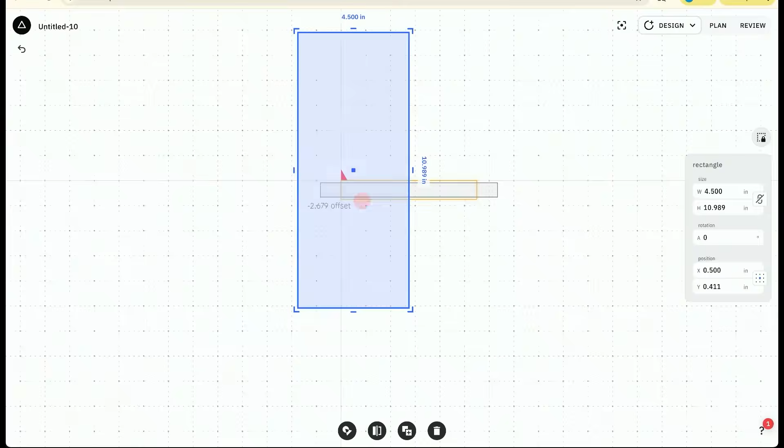Everybody, we're back from a live show where we're going over sliding dovetails. We build them on Origin, bring them in the studio, design some cool things, show you how to do tapered sliding dovetails as well, and then Jake cut them out by hand. They turn out perfect.

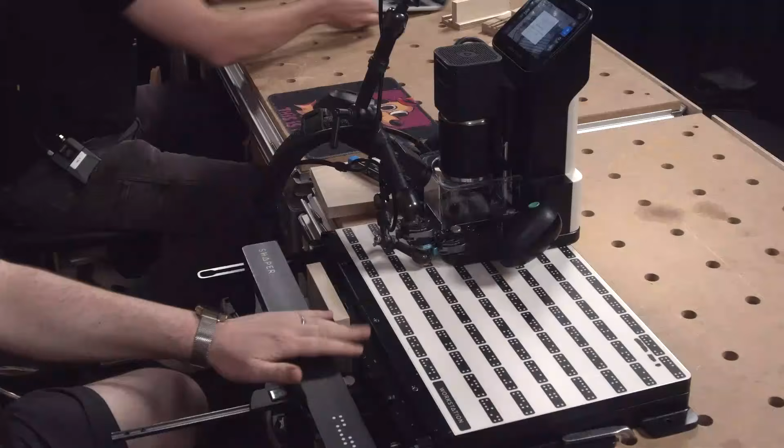All right. I'm going to start off by just getting our workspace going. We have some poplar set up, some 3/4 thick poplar. We are using our 15-degree dovetail bit.

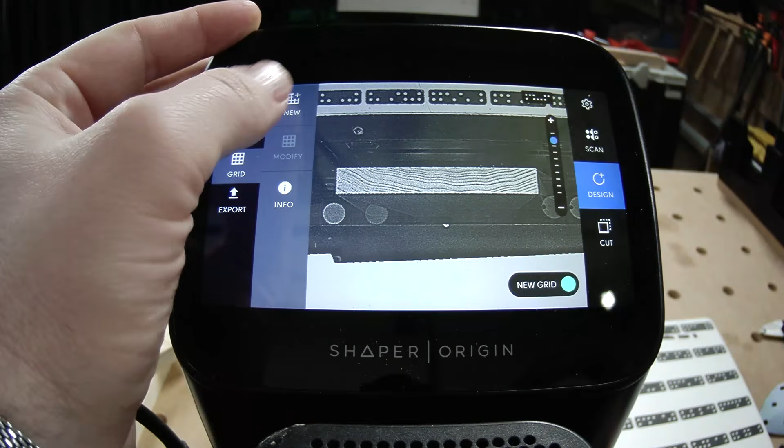I'm going to go ahead and create a backside grid. For this, we could either do a rectangular probe to find the center, or we can do a backside grid.

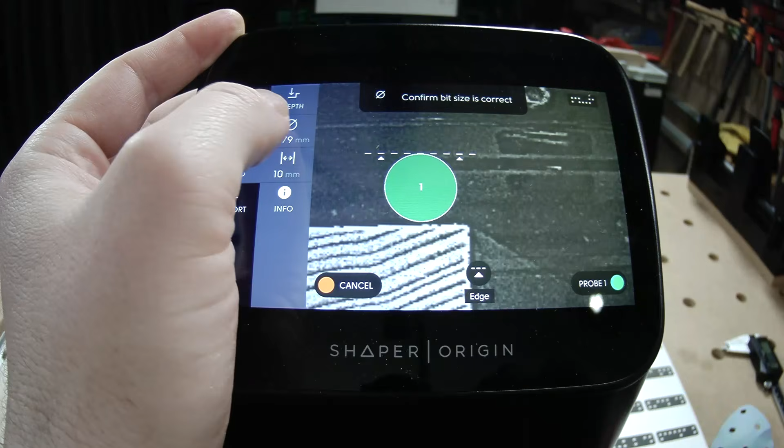Yeah, and maybe while Jake's setting that up, we could come over to this front cam for a second. When we're cutting dovetails, we want to be very careful about which way they are going with the grain. So we have the grain running this way. We're going to want to cut this way for these dovetails, because if we were to cut this way and have it on the top here, this part would want to break off quite easily. If we come here and we cut, we have a pretty strong grain direction that's going to keep it going.

So make sure you're paying attention to the grain of your wood when you put it in there, because I may or may not have accidentally cut one the wrong direction. All right, my material, so that you can get it set up in Studio, is 0.75 on the money.

We're going to pop over to here, and I'm going to make a new design. And I'm going to first enter this stock that Jake has. So how big is it? 0.75 high. Okay, so 0.75 high. And how wide? 5.5. Okay. I'm going to click this button up here to zoom to my selection. And that's going to just recenter the camera for us.

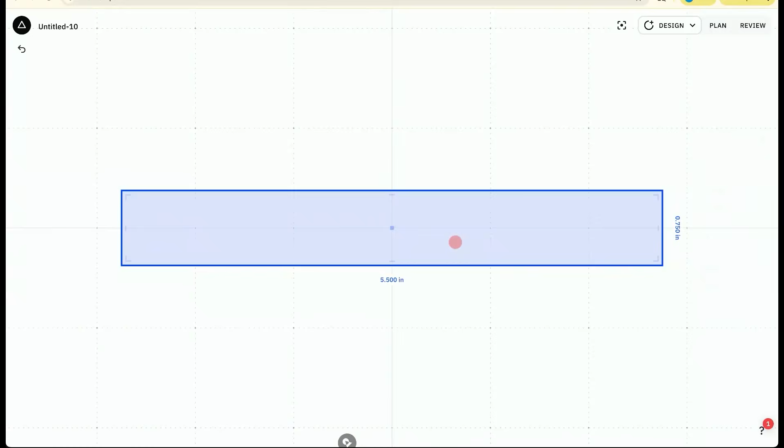Now, this is essentially our stock. So I can do a couple things. I can turn it into a reference path and use that to snap and create shapes around it, or I can leave it as is and turn it into a guide later so that we don't cut this. We just want to be able to use this shape to build our joint on top of.

Now, for the sliding dovetail, we're gonna come over to this front cam. There's a couple key parts to think about. Where did I put that bit? The dovetail bit. Okay, so the number one thing to think about when you're building this is that the dovetail bit that you're using has a certain width at the top. And that's going to eventually need to run through your material to allow this part to slide into it.

So the piece that we're going to design has to at least fit the max diameter of the bit. Okay, and in this case, this bit is 13.8 millimeters, the Shaper bit. So I'm going to come into Studio, and I'm just going to create another rectangle.

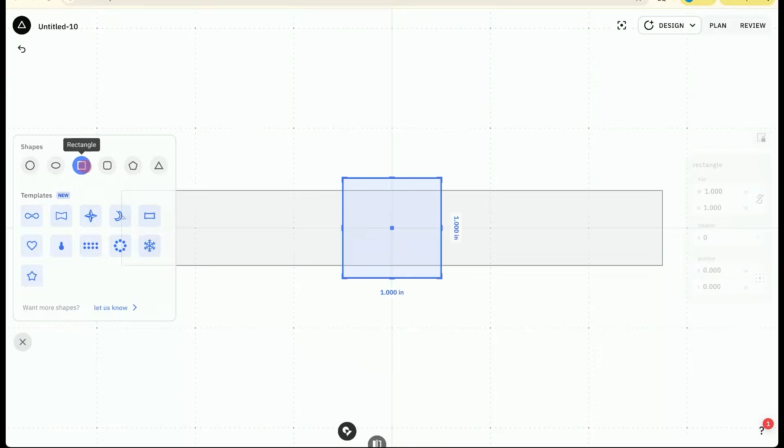And we'll start by, okay, this is one of the great things about Studio. We can go into our height, and I like to go a little bit over the 13.8, just so we get a little bit of room if we want to do some offsets on that final pass. If we get it a little bigger, we can actually, in Origin, make our cut offset and kind of clear that waste out and then come back with a nice finish pass.

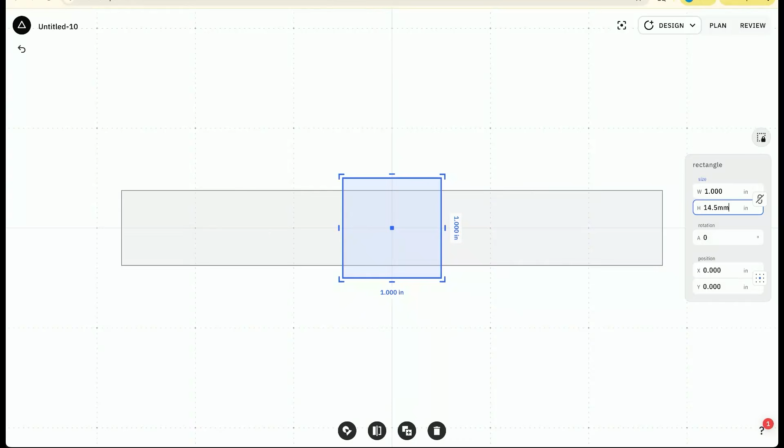So if our bit's 13.8, I'm going to do 14.5 millimeters. And even though I'm in inches right now, if I just type in millimeters here, it's going to automatically convert that. And that is great because now we have a piece that is almost as thick as our material, but not quite. We probably want to make it so that this piece here is always a little bit smaller than our stock material. Otherwise, we're going to have trouble.

This is one of the things. Basically, the diameter of your bit can't be as big as the width of your material in general. Okay, so if you have a big dovetail bit and a small piece of stock, it's not going to actually work out very well for you. You're going to find out problems later. So just make sure, rule of thumb, your stock material is bigger diameter than the width of your bit.

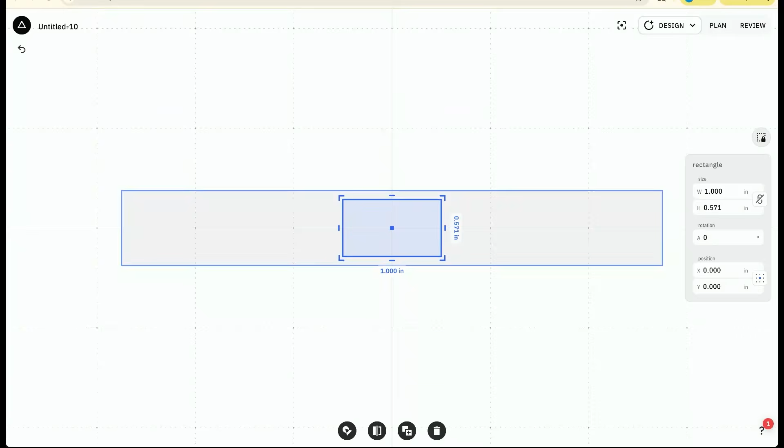And now I'm just going to take this shape. This is the shape we're actually going to cut, and I'm going to stretch it out and make it a little bit over the edges here. Now, one thing when we're using dovetail bits, when we go to cut this, we're going to plunge once and cut all the way through the material, come back around the other end, all the way back, and retract. We want to make sure that while we're cutting, we don't retract the bit, because if we do, we're going to come up through the top and we're going to have a little hole in the top where the bit is undercutting the entire time.

So when we're making this file, I'm making sure that I can plunge off the edge, get down to my depth, come through it all around it, and then I'm going to come back off the material and then retract. And that's going to make sure that I don't have any problems. And this is just something you're going to have to think about anytime you're using dovetail bits, because you can't retract in your material or you'll mess it up.

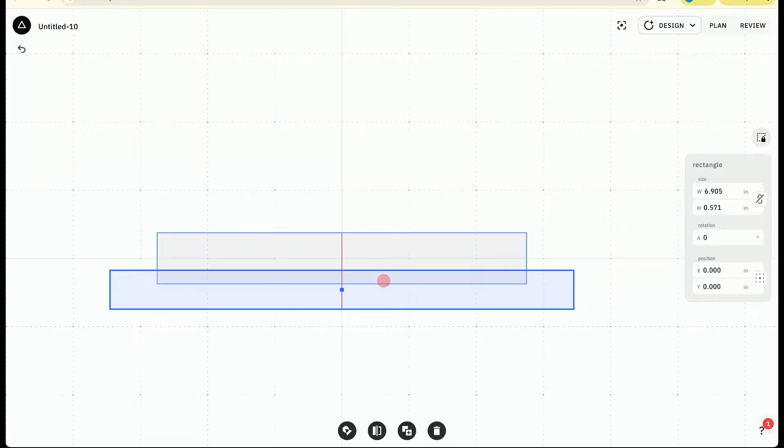Okay? So real quick, before you get too much further, a custom anchor point. Yes, let's go ahead and do that. So Jake set up for a back left grid. So I'm gonna go ahead up to the design menu here, make sure my position is on, and click this add origin anchor button. And you're gonna see a little red triangle show up. And that's gonna be the stock where that point we made the grid on shows up.

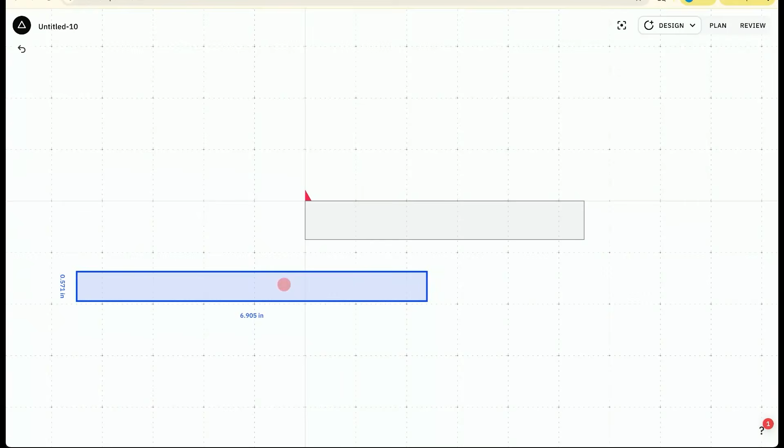So all we need to do is take this main shape, and I'm just gonna drag it and snap it right there. And boom, now we have the back corner of our stock at the same point as where Jake made the grid. So now when we import that shape, it'll go in the right spot. So I'm just gonna take this shape that we're actually gonna cut and move it back, and you'll notice these little red lines show up when I'm dragging it around, and those lines basically auto snap to other objects in the world. So as long as I see this little triangle or crosshair, it's actually gonna snap perfectly, and now I know that this is centered on that, which is great.

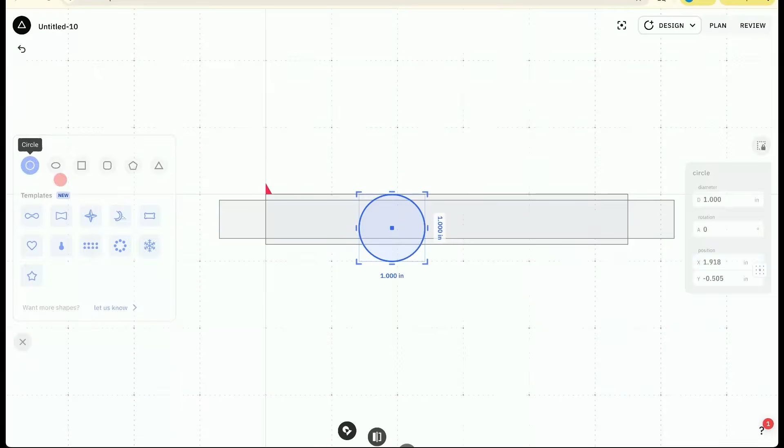Okay, now it's good that I'm coming off the edges here, because we want to come around the edge on both sides. If we want it to be a through dovetail, we need to cut dovetail all the way through the material. And then the only thing I need to make sure is that I can plunge outside of the material. Now, we know this bit is 13.8 millimeters, so I'm just going to make a quick circle to check. And I'll just change this to 13.8 millimeters. And now I can get an idea of if I were to plunge on this line over here, I'm not going to hit that material.

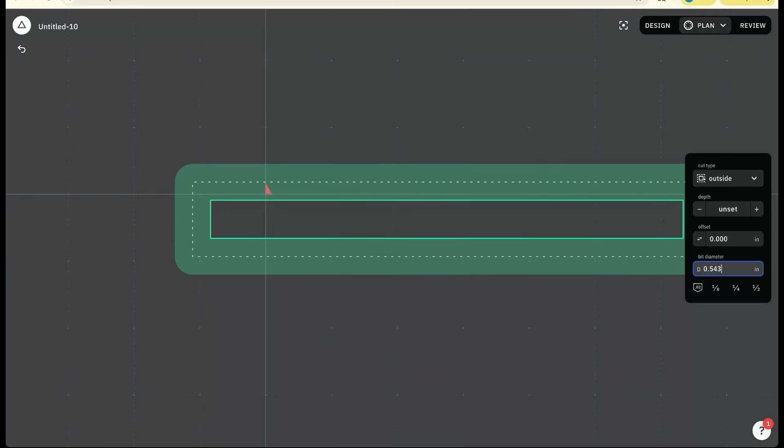I'll turn that into a reference path just so you can easily see the stock versus the shape. And that looks good. We can plunge in there, but maybe I'll make it a little bigger. It's always nice to have a little extra room so that you don't have any issues. Okay, I'll delete that circle since we were just using that for reference. And then I'm going to go to plan mode. And I'm going to make sure my bit diameter is the same, 13.8 millimeters. And now here's where the tricky part comes in, okay?

And now we're going to jump over to the community, because a friend of the community, Bo, made a little calculator that helps us determine the offsets and the depth we need to cut. So we kind of have to figure all this stuff out up front. If you just click into that link here, it'll take you to this page here that basically gives you all the settings. So step one, fill out the degree.

The Shaper dovetail bit is a 15-degree bit, so that's entered there. And I know I want to cut this to a 10 millimeter depth dovetail. And what it's going to give us is settings that say, hey, for the pins, you need to basically have a negative offset of -2.679 millimeters. And for the slot on the inside, afterwards, we're just going to cut that to 0. And so that's going to make it really easy for us.

And what I like to do in the Studio file, just to make it easy for me, and especially when me and Jake are tag teaming this back and forth, I'll come in here and add some text, and I'm just going to copy that number. And I'm just going to put a little guideline in here that says, make sure, Jake, you cut this at this offset. Okay, we'll place the text. I'm going to scale it down and just move it right where I'm going to plunge. That way we can see it and we don't forget.

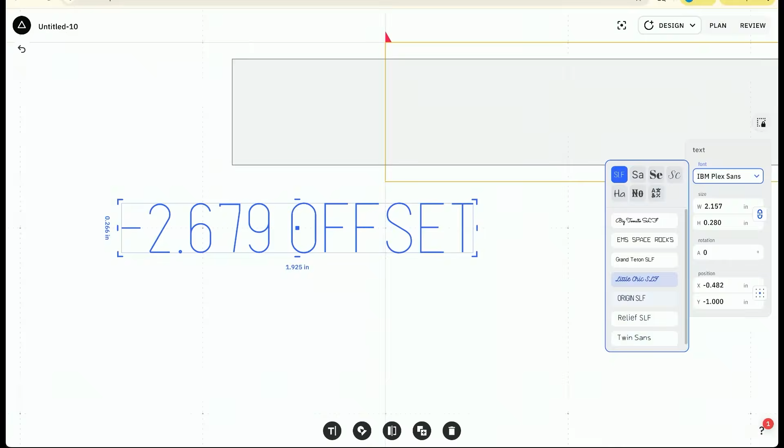And you know what, Jake? I really love single line fonts, and Studio has a great selection. So I'm going to go over there and click single line font. And which one you like? This one? Let's do Relief. It's a little easy to read, okay? There you go. Cool. So now when we go to Origin, that's going to be in there.

Now, last step before we forget, I'm going to select the shape, go to Plan Mode, and I'm going to turn this into a guide so that Jake doesn't accidentally cut these letters. But I can still see them in the file. Correct. Difference between a guide and a reference path? Yes. Guides come over to the tool. Yep. Reference paths do not. Yeah, so this stock shape is not going to come over when we import it, but the guides will. And so sometimes you need both or one or the other.

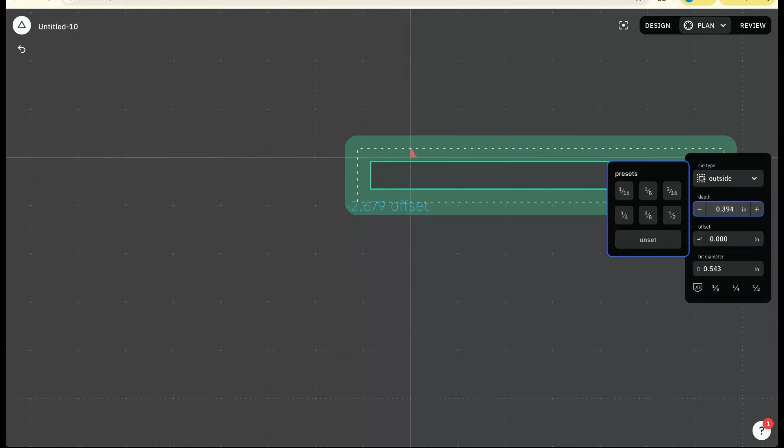Okay, so this is our basic setup, and then the last thing I was going to do is, just so we don't forget, Jake, I'm just gonna set this to a 10 millimeter depth. Beautiful. So that way, that's also pre-programmed in. Okay, so this is the most basic file I could build to do a through sliding dovetail. And there's a lot of complexity that you could add to this, but even with a couple simple rectangles and using the calculator from that website, we basically have everything we need now.

So maybe, Jake. It's on there. Yeah, should be on there. Should be ready to roll. I was gonna say, so far we could make that design directly on tool. Yeah, we could have totally made it on tool. But something tells me when we get to tapered land, yeah, and Studio, after the break, we'll need a little extra.

All right, I went ahead and made a back left grid. Let's bring in my top line file. And using the custom anchor point, drop it at 0, 0. I went ahead and just did a manual Z-touch. Yep. Right on the edge of my material. Yeah, and when you're working with dovetails, I would suggest manual Z-touch is probably the way to go, just because there's so many little details along this step. So I've been doing manual Z-touches for it and had pretty good results.

It depends, too, if your dovetail bit is center cutting. Yes. Which often they are not. Yeah, if we were to look here, the only cutting parts of the dovetail bit are on the top corners, and the inside slants down. So when you Z-touch, you're only touching off those two tiny little points, and sometimes they will dig into your material. Yeah. So anytime you have pointy bits, just use manual Z-touch, and then you'll keep going.

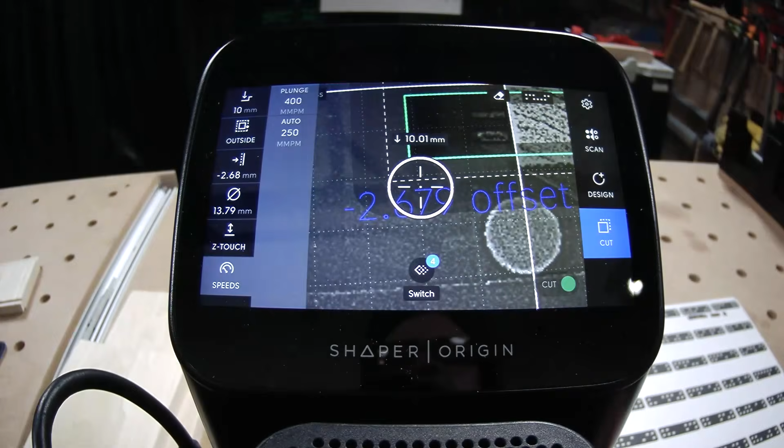Yep. Okay, Jake, I think we're ready to cut. Let's go over some details, though, before we do this. One detail: do not click the red button when you are under the material. If you find your depth's wrong or anything, you need to get out of that material before you retract. Otherwise, you're going to come out. So that's the one. And then 2, make sure you plunge off of the shape when you start, because you don't want to start on your material because you'll do the exact same thing.

And 3, slow yourself down on the exit. So I'm going to slow down considerably when I finish the cut. Yep. To try to avoid any blowout at the back end. Correct. All right, here we go. What spindle speed are you at? 5. Okay. Yeah, feels right. Yeah, 4 to 5 feels good. Don't get too fast, because if you're undercutting, you start burning up a little bit. You really can't retract and get out. So I'd say 4 to 5 is a good starting point. 4.5. All right, let it rip.

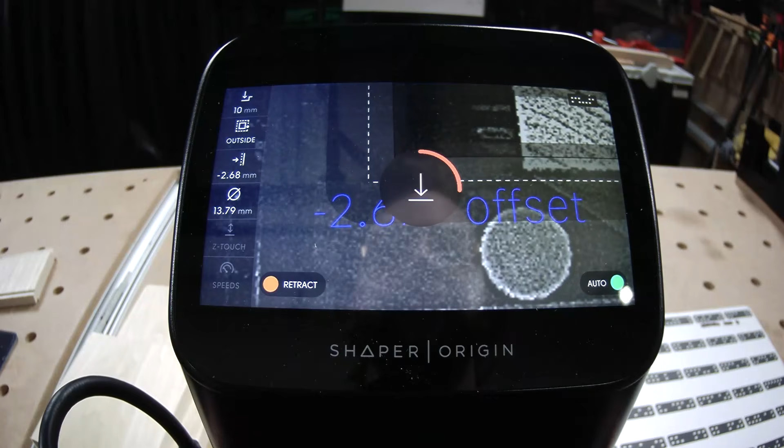So, you also have to do this in one pass. You can't do multiple passes here. So how deep your dovetail is determines how hard the cut's going to be. You can see here Jake's slowing down now as he goes around that corner. Anytime you come in or out, you want to just go slow, because you will see tear out. Now we're going to talk a little bit about what to do in that case and why this kind of through sliding dovetail is pretty cool, because we can eliminate that tear out later by trimming the pieces. But you can see it came all the way across the edge and then retracted when he's off the shape.

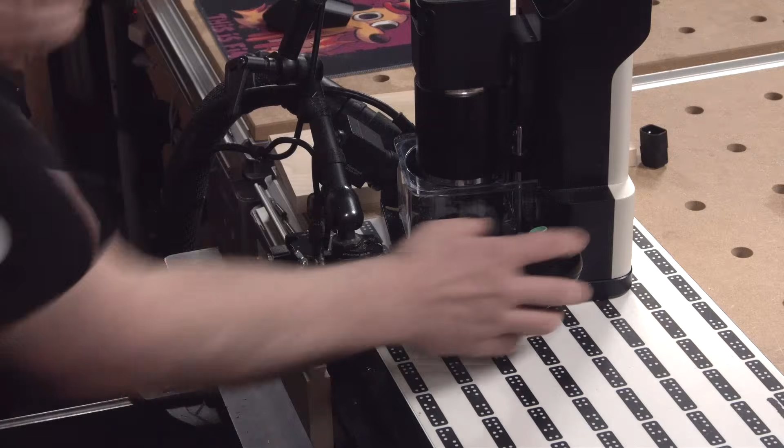All right, so let's take a look and see what we got. How's tear out look? Perfect. Nice. Yeah, if you move into that cut a little slower, it will do a better job. And then especially when you get on the outside and you're going into air again, definitely want to slow down a bit. Okay, so one cut. If you wanted to, we could have done 2 offsets, but in most cases I've been feeling pretty good with a single pass, going slow, getting good control of the machine. Yeah. You don't need to do an offset and then a second pass, but we're going to do that when we get to the other side. Okay, nice. So that's pretty much it for this. Set up for the next spot.

Okay, now there's a couple things. We may have to change one little thing in Studio because I forgot. What'd you forget? Well, maybe while Jake's setting this up, I'll explain and fix it. So when I made this file, we know that we're using this back grid. Now we're going to rotate our stock 90 degrees from that, and we're going to cut it back and forth on the workstation. Now, the workstation has some space behind it, and you can see here, this is a key part. We've lowered this down to the first row, so that way we can cut beyond it and come back. Now, this dimension, do you know off the top of your head? 25 millimeters. 25 millimeters of depth. Oh, yeah, this way is what I'm looking for.

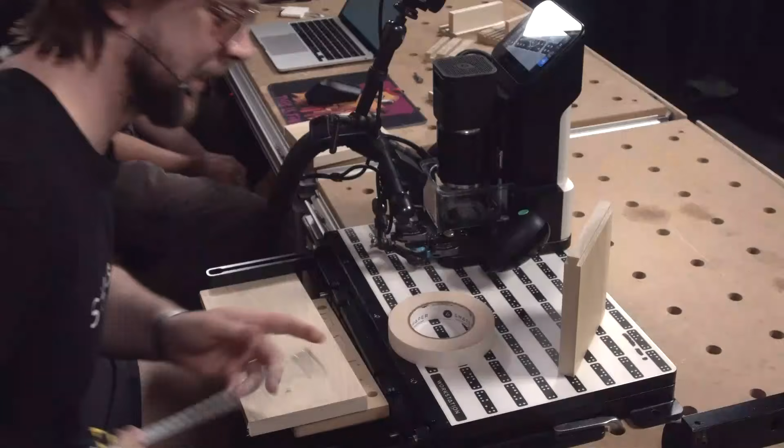I don't know, but I have tape right here. 50 millimeters. No, it's 21. 21 millimeters. Okay, so let's come here, and I'm just gonna kind of give you a quick understanding of what's gonna happen.

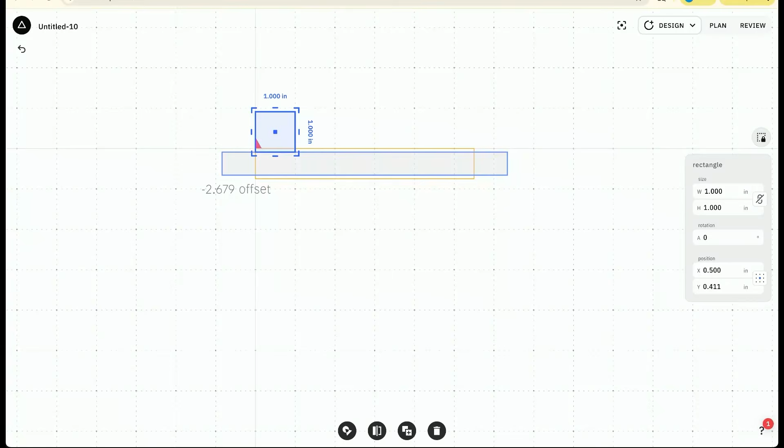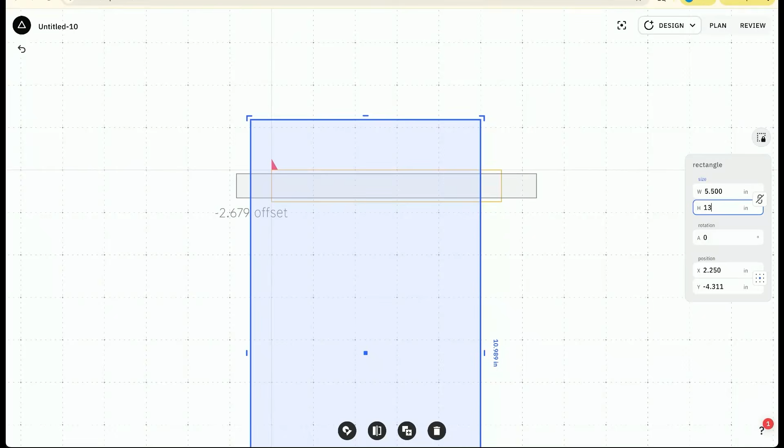So I'll draw quickly a rectangle, just to represent our material, like our stock would be, and make it a little bigger. It doesn't have to be perfect, but just to give you an idea. This is essentially the stock we have, and our sliding dovetails are going to cut through the stock. Now, what size is this? And then I'll just type it in, and then we won't have to guess. This is 5.5. Okay. By 13 and 15/16. 13 plus 15 divided by 16.

Don't you love Imperial?

Okay, so now we have essentially the exact piece of material that's going to sit on the workstation. And so we can kind of put it wherever we want. Now, one of the things you're going to notice with sliding dovetails, and I made my mistake already, so you can learn from me. When you make one, let's come over here, and I'll just explain this real quick. So let's say this was our material here, this right here, and it comes all the way across, we're going to cut that sliding dovetail through right near the end because we're making a cabinet.

You need to make sure that you're not too far to the edge, or else you're going to have no strength on this little piece, and it's just going to break off. So you kind of need to step it in enough that it doesn't break off. And this is going to be a key thing where, if you were doing a mortise and tenon or something, you could put it right on the edge. But when you're doing these sliding dovetails and you're using them as support, you need to make sure you're worked in at least a little bit, because you're even going to cut in a little of where the material is. So just a thing to think about.

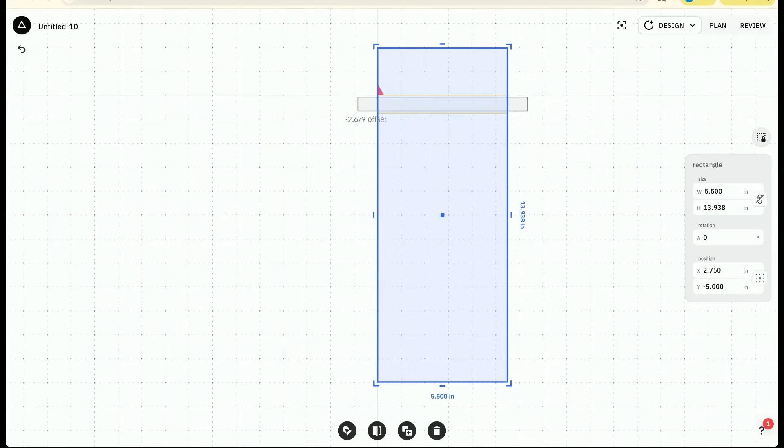Now when we come back over to Studio, that should make a little more sense. I'm just going to make sure this material has got some space between the corner. Obviously, if you were designing something, you would dial it in a bit more. Okay, so now we have our stock. I'm going to go ahead and make that one a reference path too, just so we can keep an eye on it. And I'm going to come over here and make one more rectangle, just so we can make sure we're not going to cut into the workstation.

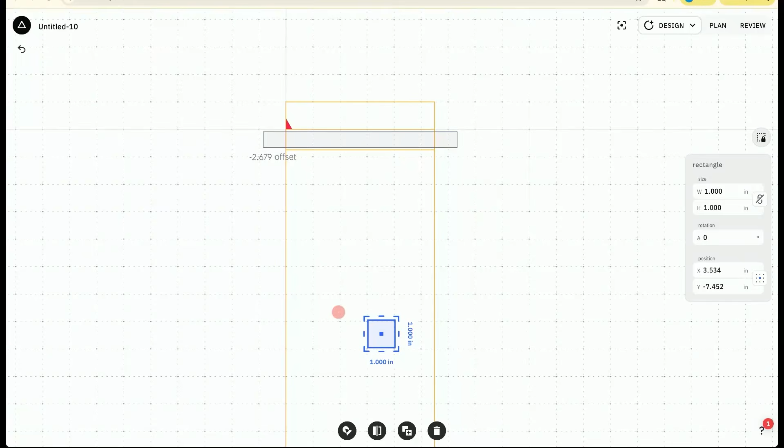So I'm going to take that little rectangle, and we said, what, 21 millimeters? 20. 20 millimeters. So we'll just make a little square to represent. So this would be right on the edge of that material. And you would see, if we were to cut this right now, when we're going to cut an inside pass on this, we would kind of run into the workstation a bit. Okay? So in order to fix that, we're going to want this lead in, so we're off the material here when

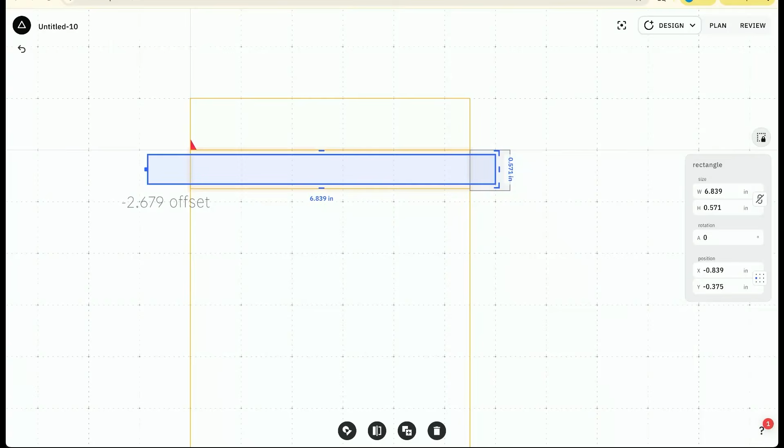we come in. But this, I'm just going to reduce by changing the anchor point to the front here. And then I'm going to grab this slider and drag it down so that it comes out the back enough that the bit will clear it all, but not run into the workstation. Nice. Okay. And I'll turn that into a reference path too, so it doesn't show up. Okay, the only other detail here is now, instead of cutting an outside cut, we're going to cut an inside cut. So I'm just going to change that from an outside to an inside.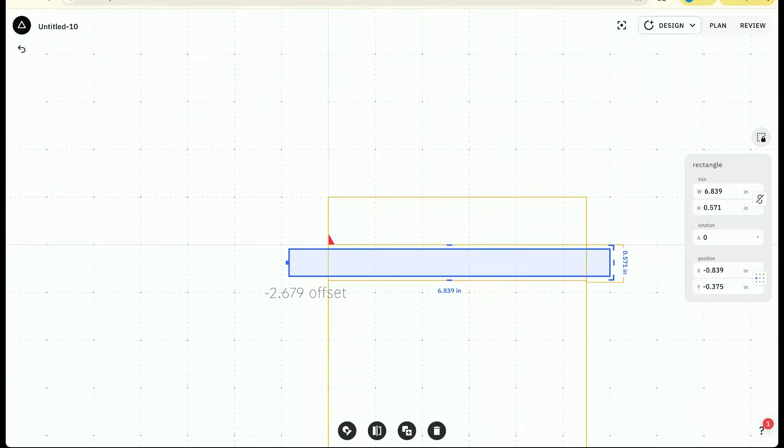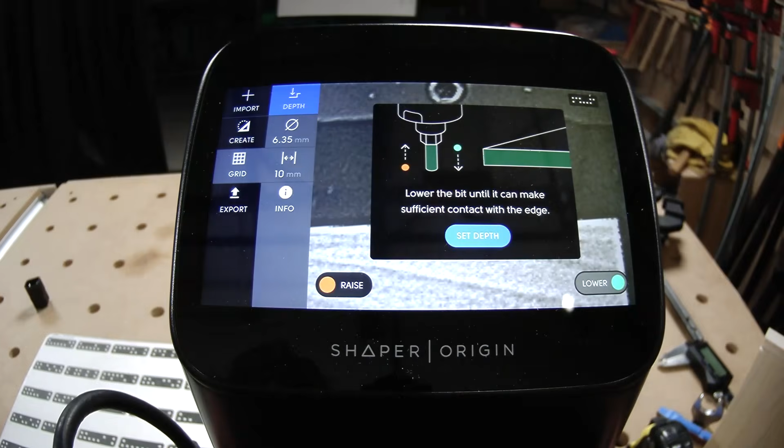And this is great because you can see here with the bit diameter that we're using, I have just enough room to do a little inside pass with a small offset, and then we'll come back and do a final pass with a final offset. Perfect. So my roughing offset should be, what, 0.5 millimeter? I don't work in millimeters, but I would use 200ths. 200ths. You got it. And I'm not going to make a backside grid again. I think in this one I'll do a front side. Yeah. Just so we can reference that front face. 1, 2, 3.

Mm-hmm. Yeah, it's pretty fun.

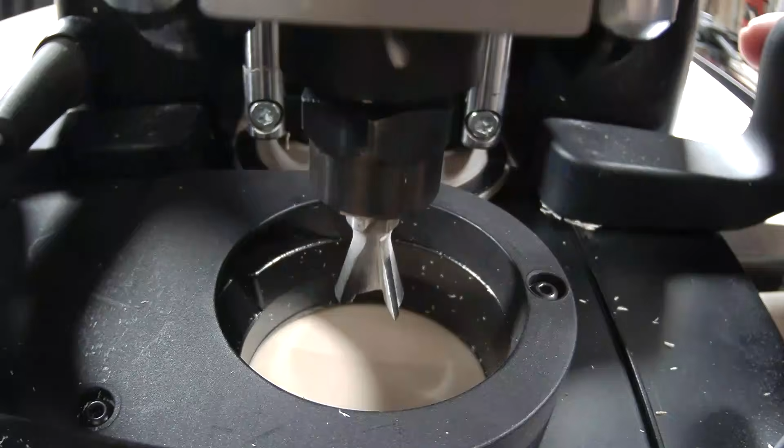When we go to the second part of the show, I'll show you a little cabinet I was working on, and you can see how some of these things will just add up to a pretty sweet little thing. I would say cutting sliding dovetails is more complicated than a lot of the types of things you'll do on Origin, but with a little bit of practice, you'll start feeling really comfortable, and it kind of adds a whole other dimension to interlocking joinery.

You know what's nice about this one too? As I'm just tapping that green button to lower down for the manual Z-touch, I'm tapping really fast, moving Origin to see as soon as the blades catch and twist slightly. That's my 0. Yeah, ideally you want to lower it with just slight taps, the lightest little tap you can do, and then drag it forward and backwards or twist the Origin a little bit, and you'll see it just take a tiny little hair off.

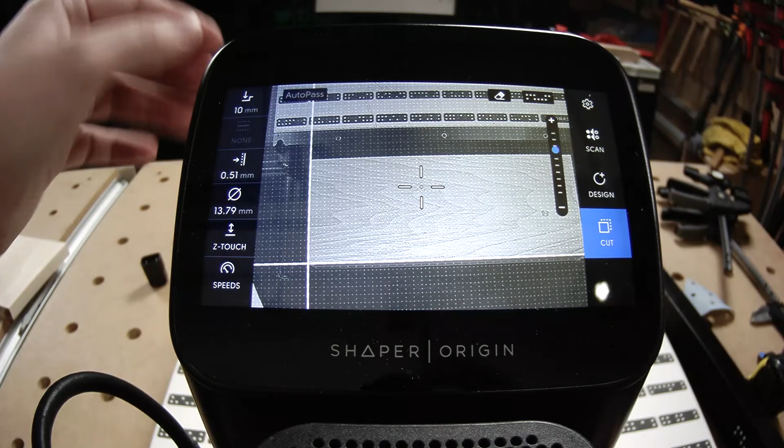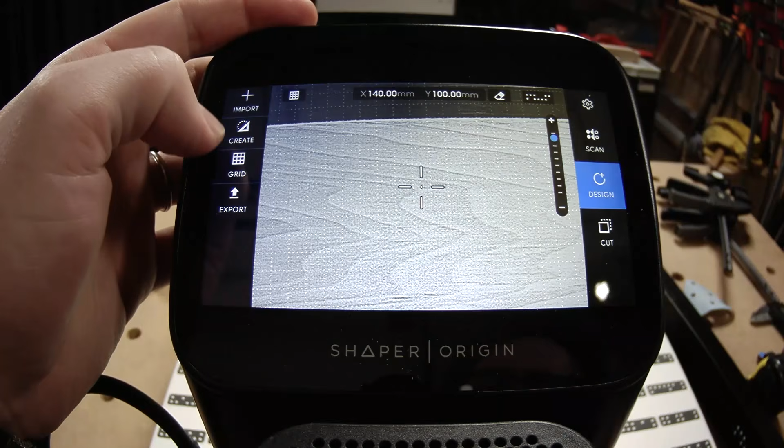Okay, here we go. So we'll import this file. Now this is the straight sliding dovetail. So this means the file that we cut already and this file are line to line, perfect all the way down. Oh, that is it. You're gonna have to rotate it. So we'll bring this in. It's gonna come in with that anchor point. Just rotate it 90 degrees negative, and then we should be good to go.

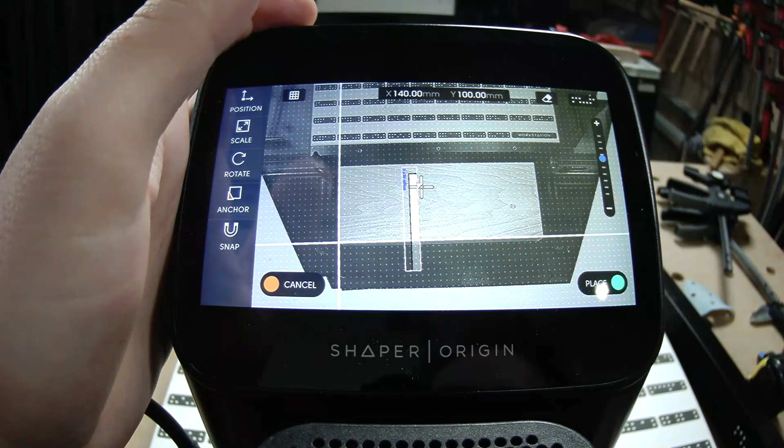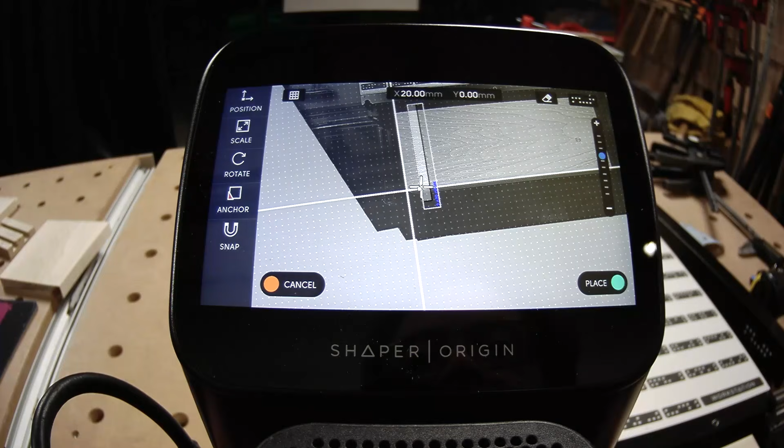There we go. Okay, and then you can pick wherever you want it to go for this one, but don't get too close to the edge. Our Y is set to 0, and we're stepped in. Let's do something like 20 millimeters. Okay. All right, so now we've Z-touched. We have our bits selected at the same diameter. We're going to change that offset to 200ths maybe, and that'll be our first pass.

When you're cutting in grain with a dovetail bit, it feels pretty easy. When you change to this mode, things feel a little different. Right. And so I would suggest that first pass, try to offset it just a little bit so if you do have any wiggles, when you come back around with that final cut, you'll get a nice clean finish. Okay, our slot is just barely bigger than my dovetail bit. So we should have made it a little bigger. I can only do 0.3 millimeters offset. All right, let's do it.

Okay, so we're going to do 2 cuts, plunge off the material, go all the way back and forward, and then retract when we get back to the end. And look at that, plenty of space. I can see my workstation. We're good to go. All right, let's do it.

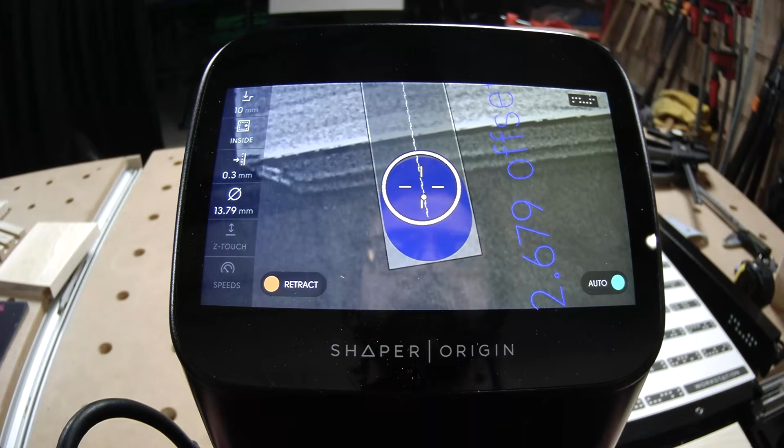Yeah, just slow and easy on the entrance. You will feel more resistance than when you're cutting the other one, but just keep going, slow and steady. Do not retract in this spot, because if you do, you'll blow a hole in the top. But you're gonna see here, Jake is just taking it nice and slow.

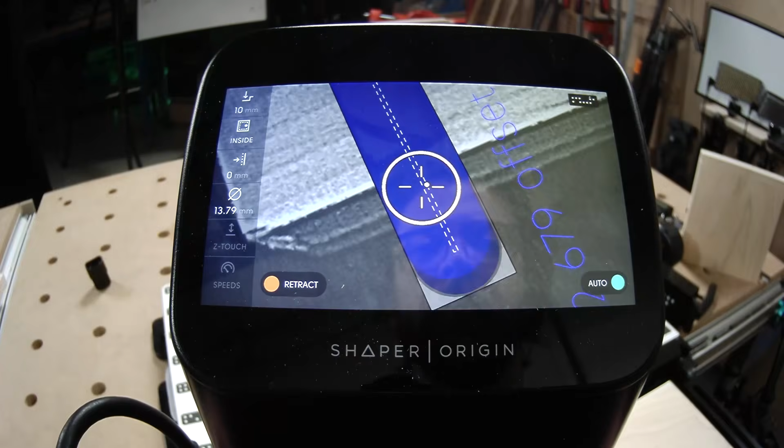Let auto work its way around, and then that second pass on the way back is going to be basically cutting nothing because your bit's so close to the middle. Okay, and now he's going to change it to a 0 offset. Cut that. All right. Make sure you come all the way off that shape, retract.

All right, and now comes the fun fitment part. How you feeling, Jake? I'm feeling great. You are? And I had 0 tear out. Oh, nice. Well, a nice sharp bit will do that. We're cutting poplar today, so not the hardest material. If you were cutting a harder material, a more brittle material, you'd probably expect more tear out.

I noticed you did Doug fir for your cabinet a couple of years ago. That was a choice. That is a choice. I mean, I like it a lot. It's just, you know, the Splinter King, huh? Yeah, my favorite type of wood. It's one of my favorites, too. And I keep trying to make it do things it doesn't want to do.

All right, so we don't want to force it in yet. It may not be quite right. We're going to have to do some checking. That feels line on line. Yeah, and so the first step when we're trying to figure out fit, and you're not going to be able to see it over there, but I'm going to bring it over here for a second, is we want to check where, let's see if we can see, yeah.

Okay, so we're checking how deep the shoulder is, and the shoulder here, not that shoulder. This shoulder and the bottom of your material is to your piece. So when we slide it in, you're not going to be able to get it that far in, but you're going to be able to look in here and see if there's a gap here or if there's a gap on this part here.

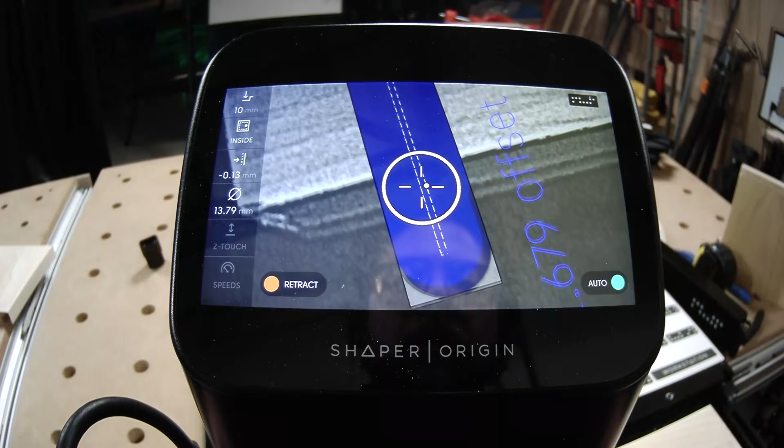Now, the fitment of a dovetail is kind of up to you, depending on the situation. If it's a joint you're going to glue and never touch, or a joint you're not going to glue and let the mechanical strength hold it together, you're going to look for different fitments. And one of the things you're going to find with these straight dovetails is the fitment can be one of the harder parts. As you move it into the material, it's going to get a little bound up. If a cut's not perfectly smooth, if there's a little something here or there, if the wood's moved on you, you're going to have to finesse that.

Now, the tightness is up to you, and you can use these offsets to kind of pick it out. We went 5 thou. Oh, you're looking at the hammer? No, I looked at it, and then I said no. We're going to go to 8 thou? Let's go to 8 thou. I think when I did my last one, it was like 8. You could easily just open it up a little bit more and get it fitting quickly, but I really like a tight one.

The nice thing about a nice tight dovetail is it basically gives you a 90-degree joint without anything. It's the nature of how it's built. It just sucks it in. You get a 90-degree joint. Don't have to clamp your cabinet all weird. All right, one more. Let's do one more.

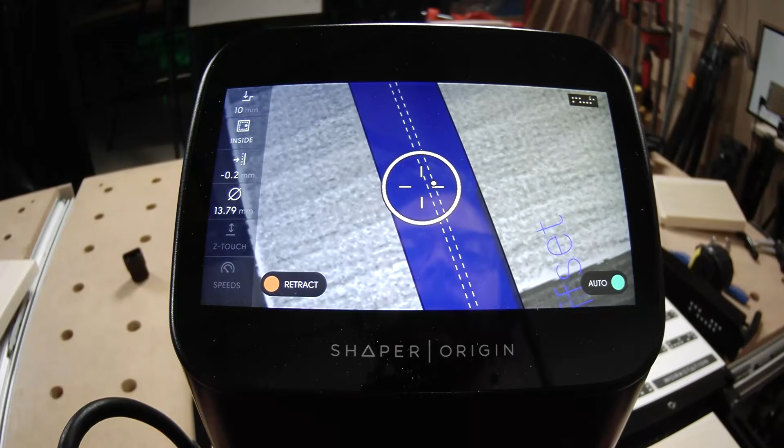Now, obviously, once you dial this in with the bits, you can just run through all your other ones. Everything should line up. But getting that first fit right may take a couple times of figuring it out. All right. This one's for all the marbles. There it is. Oh, yeah. Perfect. Nice. Now, that sound is what you're looking for. Oh, yeah. Very nice. Okay.

So this is, I don't want to say rare necessarily. It works like this quite a bit. But there may be times where you cut and you get it halfway in and it just will not go anymore. That straight dovetail is going to cause issues where as you enter more of the dovetail into the slot, it's going to bind up more and be hard to put in. So that is the straight sliding dovetail. And after the break, we're going to talk a little bit about a tapered one and why we might want to do that.

Now, the one thing I did want to talk about here is if you are seeing a lot of tear out, if you're using a brittle wood and you cannot get rid of it, a cool tip that I saw online is essentially to make the tenon part, or the dovetail part, I guess. It's not really a tenon.

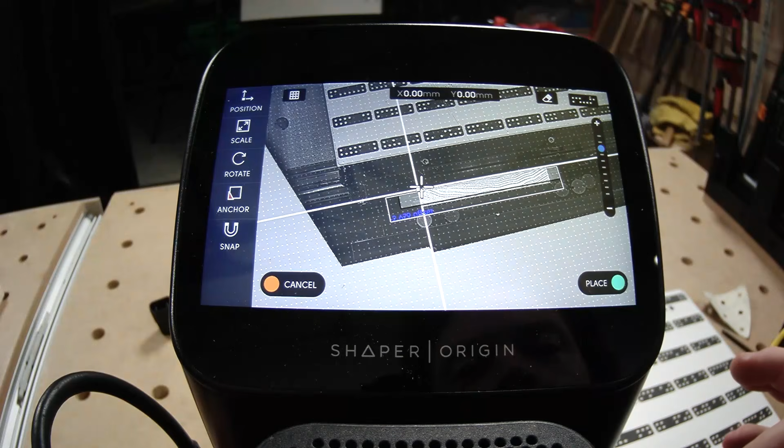So we'll start by cutting the same one we cut earlier. No need to redo that. You can just import that and cut that, and then we'll jump over to Studio, and I'll show you how we're going to modify it for that taper. So this is essentially just a repeat now. Yep, that's correct. Did you? I did modify it a little bit, remember? I made it shorter on the one end. It's okay. I think I can work with that. Okay.

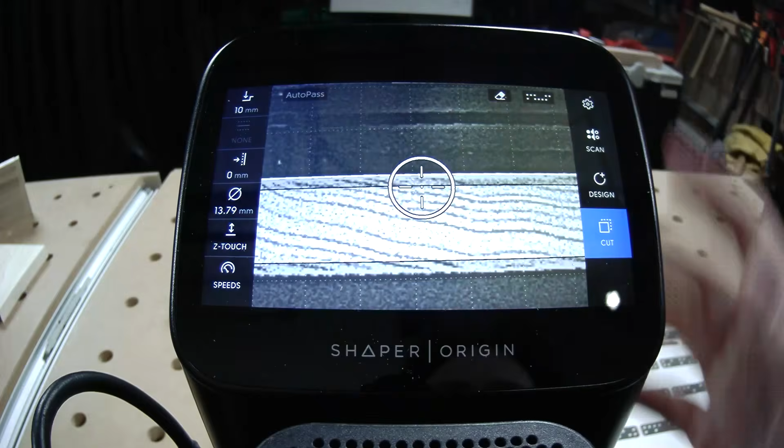Okay. Remind me what that offset was, though. That offset was in the file. Oh, yeah. On screen. Written in giant text. See, that's where I like this. You're like, oh, dang, I got to go back to the calculator, enter my stuff to figure it out. Nope. We already did that work. Just type it in, make sure it's in millimeters. Beautiful. Okay, so we're going to cut this just like we did the previous one.

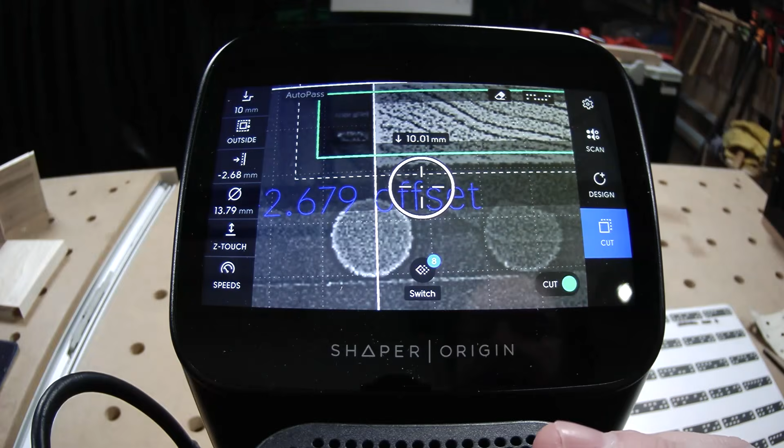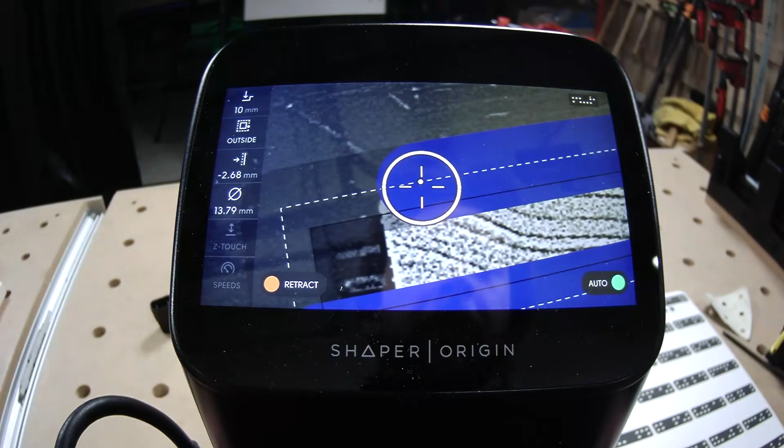I love watching the dovetail go through it on the bottom, and you see that undercut. You can see why if he was to retract now, the bit is inside of that, and it's going to destroy the top of the workpiece. Slow down towards the end, and boom. Okay. All right, so there's our straight dovetail. And now we're going to come over to Studio, and I'm going to explain how I quickly make this file.

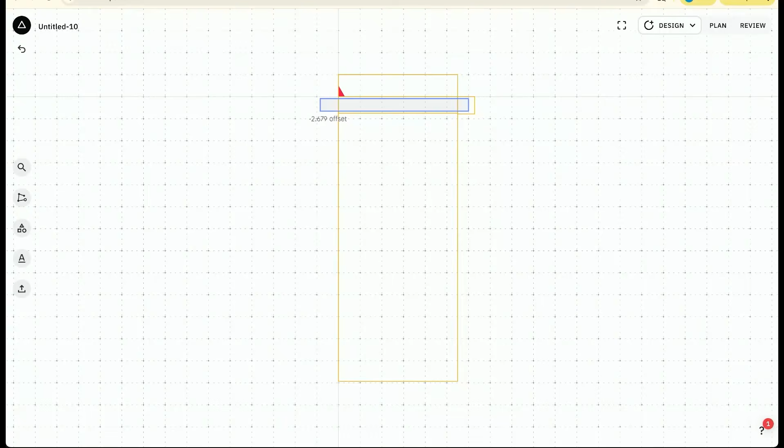Okay, so I'm just going to select that shape that we were already working with and zoom to fit. And so essentially, if this side over here is the front and that's the back, we want to open the side that's not going to be seen, especially if it's a through dovetail. Because the taper is going to be wider on one side than the other. So we're going to basically recreate this shape with a tiny little offset here and use the pen tool or the draw tool to open that up.

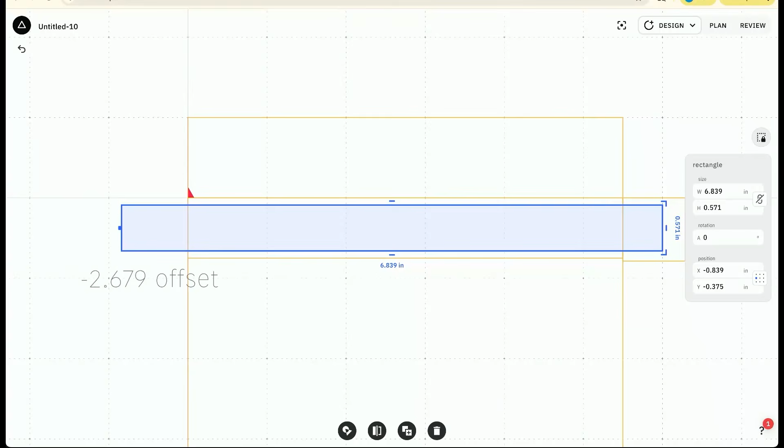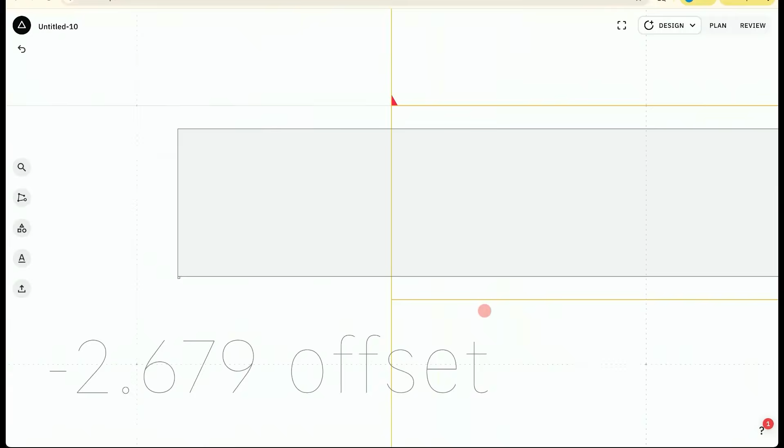So I'm just going to zoom in here, and I'm going to start by adding a little tiny rectangle that is 1/128 inch by 1/128. I tried a bunch of these small ones to find out what was working well, and this is the one that I found that has been working well for me. So I'm just going to snap it right to the corner of this material. So now you can see where I'm going. I'm going to basically make a draw tool that uses that little point and then goes back to where we're at.

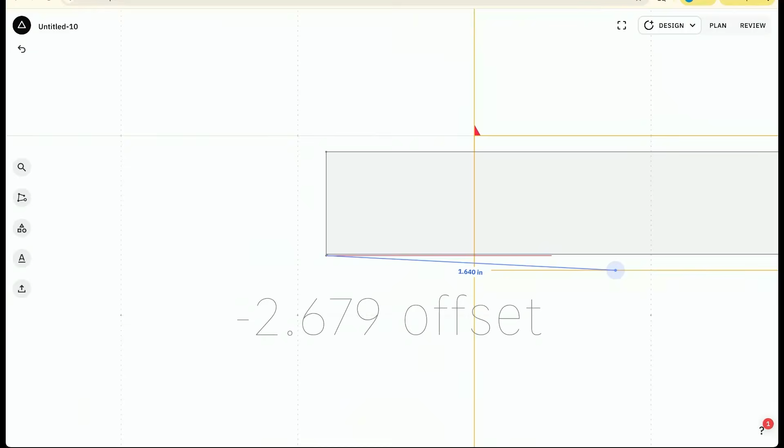So I'm going to come over here to the draw tool, and I'm just going to go clicking around every corner. So this corner first, then I'm going to zoom in here, and make sure it snaps to that corner there. Okay, cool. And then I'm going to zoom out and pan down here. We don't have to be so far in. Okay, and then I'm going to come down here, and click this little corner. And I'm going to click this little corner.

Cool. So now we have a draw tool that, if you look, is a little bit different than that previous shape. Everything matches except for this one edge, and it's now a leading edge to go in. So I'm going to delete that other one for now so we don't mess it up. And now we have the draw tool shape that I just made, same reference as we were previously using. And the only thing I need to make sure I do is turn this little tiny rectangle to a reference path. So now we've used the draw tool to taper that shape just a little tiny bit.

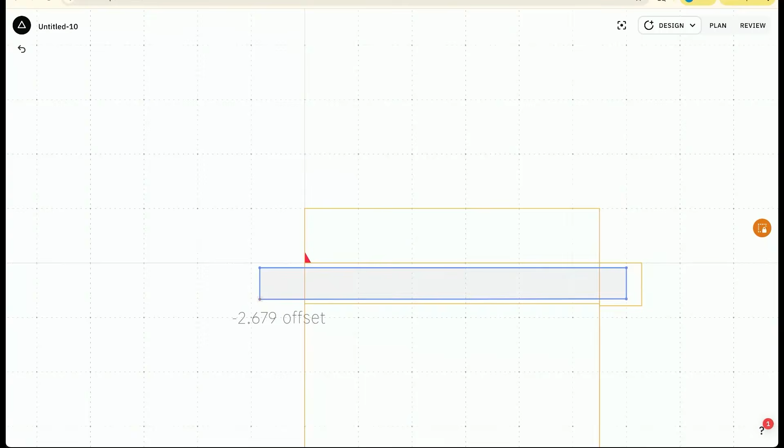I think the angle is, if you were to click the shape, you would see it's essentially a 0.07 degree angle. Wow. Okay. And that's one of the cool things about the draw tool. If you click the corners, you can understand these.

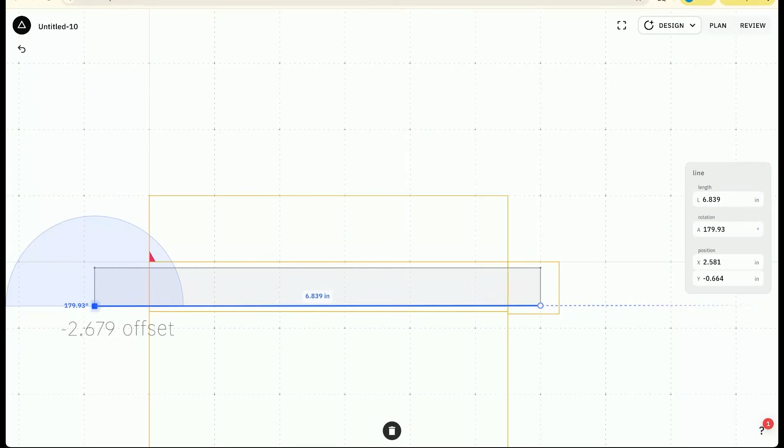And we could also modify that if we wanted to open or close that angle up a bit. Okay, so that's it. It's now a taper at the front, and then it gets a little thinner towards the back to what we were previously doing. And that's just going to allow that dovetail to kind of slide in and then tighten up over time.

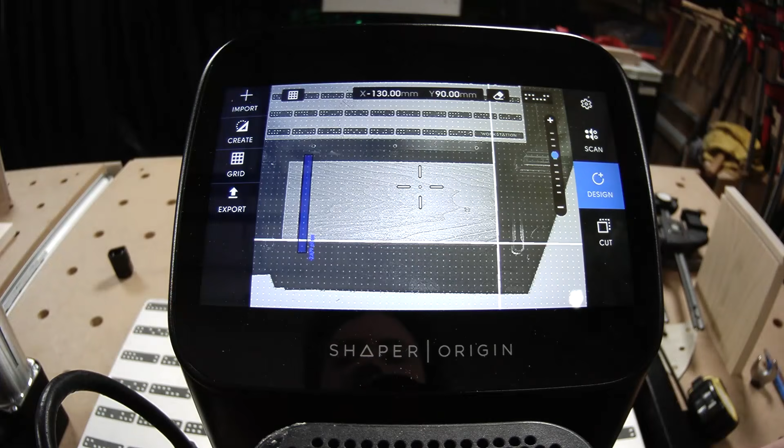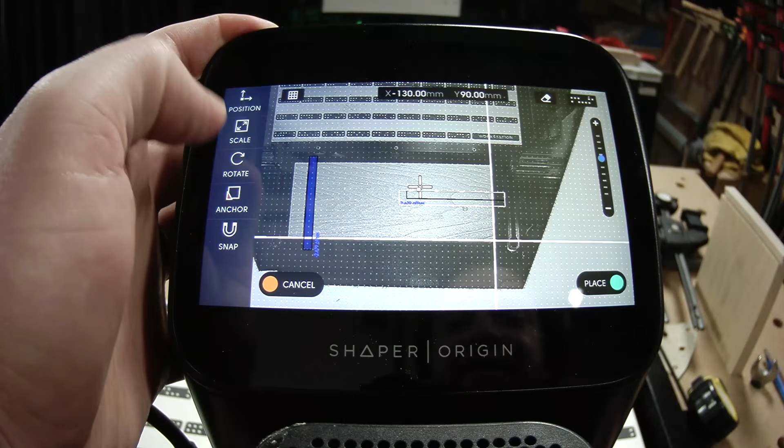Okay. Just regridded on the right side now. Oh, nice. So I'm going to bring that file in. I like this, build a file in Studio and then use the grid on Origin to move things around and make sure it's snapped properly. Rotate 90. Nope. Rotate -90. A little acrobatics with the rotation.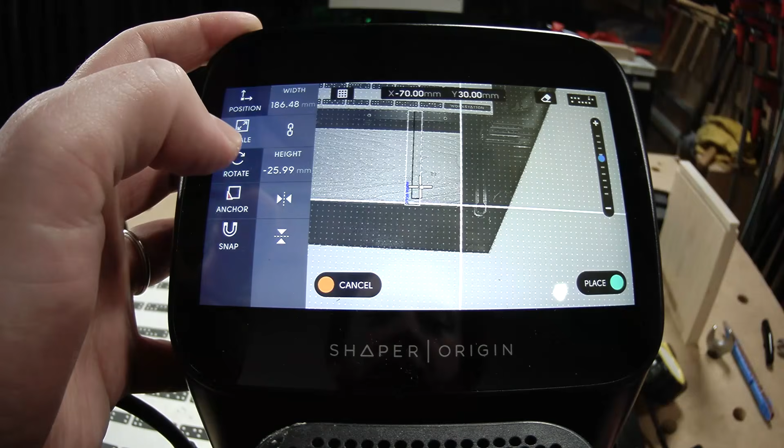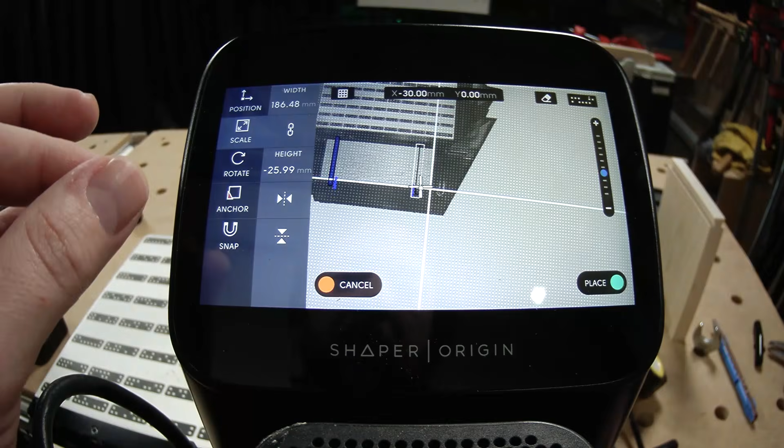Yeah. Well, it's the beauty of Origin, you don't have to go back to the computer to fix some of these things. I'm also going to reflect it because I measured, my last one was, I want to say 30 millimeters from the edge. 20, thank you, Ian. Bingo. Okay. Now you have that set to online. I screwed that up, because I didn't change it to an inside cut. So we'll just do that on the tool.

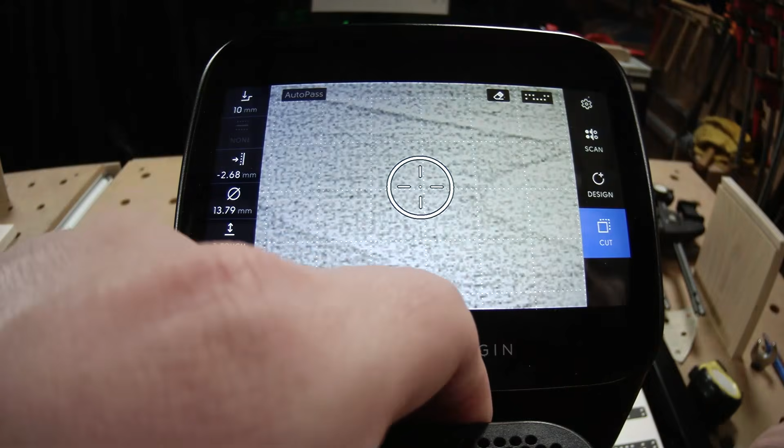Swap back to my dovetail cutter. I will say, with the gridding back and forth, make sure you're always checking which spindle's in. I may or may not have forgotten to swap spindles earlier. Plunging with the probe bit. Yeah. Well, sometimes when you're cutting, the dovetail bit can feel a little heavy, and it was feeling real heavy. And then I was like, if it feels too heavy, you just kind of stop, figure it out, and then I realized, oh yeah, well, that'll do it.

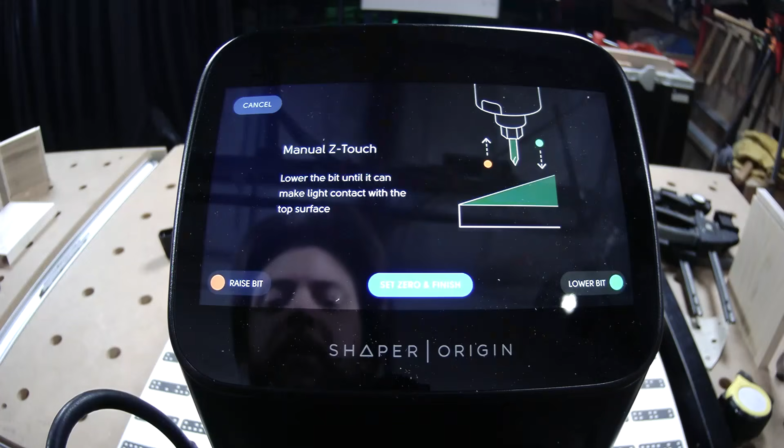So I'm moving back and forth, tapping that green button. There it goes. Just that little bit of motion tells me I have made contact. Yeah. All right, and then we'll kind of do the same thing here. We'll cut something with a tiny offset, just so we have a little bit of room, and then we'll cut to 0, and we'll start there. All right. Beautiful. Double check. Great. Here we go. Okay.

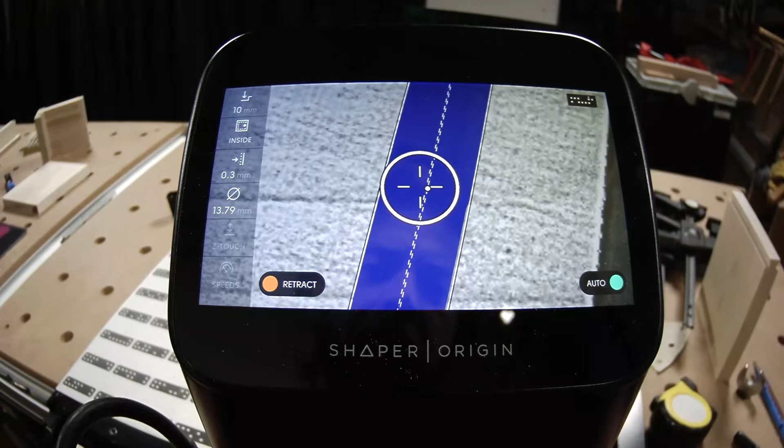Yeah, just go slow and steady when you're starting these side grain cuts, because it'll feel so much different. If you're expecting what you expected when you're cutting those vertical cuts, you're going to be shocked. It's just a very different level of pressure. Okay, and then we'll change that to 0.

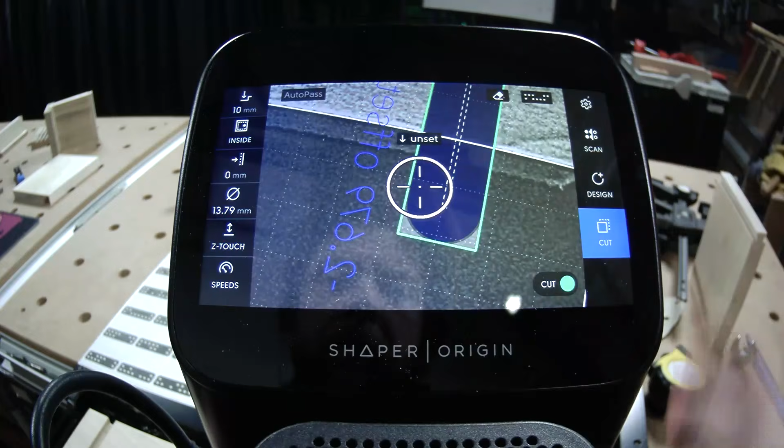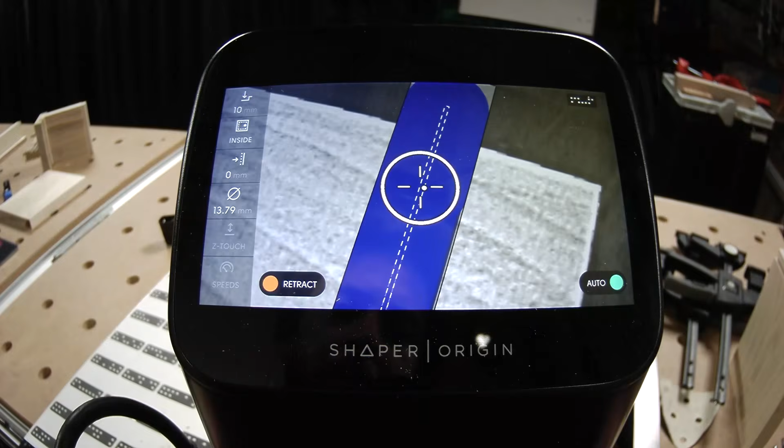Now, I didn't realize this, but Jake could have been using AutoPass if he would have turned the depth passes off. So maybe I'll quickly show that after this. Not that it's going to save you a lot of time in this situation, but it's kind of fun because it would combine the roughing and finishing pass in one little go. You could just go around twice.

Now, if you are using AutoPass or you're using Bench Pilot, you are going to need to make that distance where you're ramping into your material a lot further. So one of the pros of not using Bench Pilot or AutoPass for these cuts is you can plunge cut right over the top and then start moving. With Bench Pilot, you're going to need a longer ramp. And I saw Bo actually updated the website he created to get these numbers, to tell you how long the ramp needs to be. That's cool. Yeah.

Okay, so one little keynote. You can see here, Jake's just kind of sanding off the top. What I've noticed is when you're cutting with a dovetail bit, it almost seems like it's a little upcut bit because the fibers want to come up a little bit. And so you need to sand that off because that little amount will keep the shoulder from seating well. So just a little sandpaper.

All right, so let's see if this is going to... this may or may not go. It will probably go in the beginning. The question if it will go after is another... It'll go. But again, pretty line on line. Yeah. And this is where, I think, you're going to want to open it up a little bit, but definitely not as much as we previously did.

Maybe like 4 thou. 4 thou. Try that. You know, you can always go more. It's hard to get the dovetail to fit tighter. That is true. It's only going to fit looser because the fibers are going to compress. They will over time, too. Yep. All right. Quick one here.

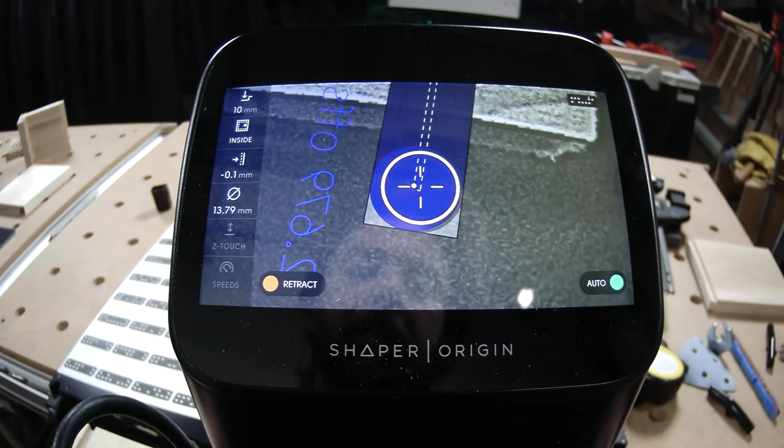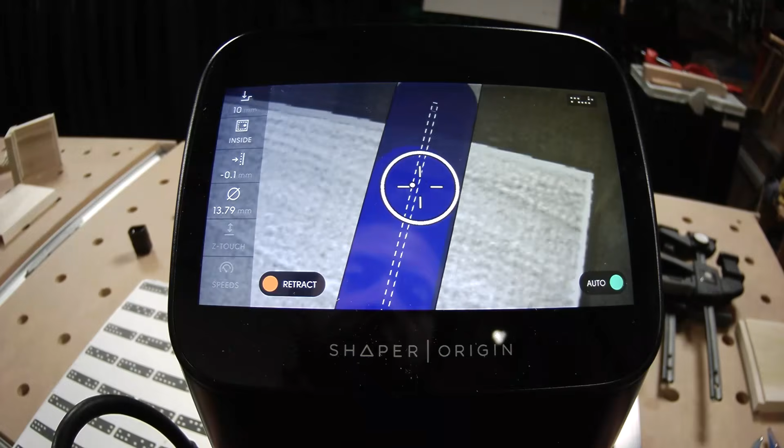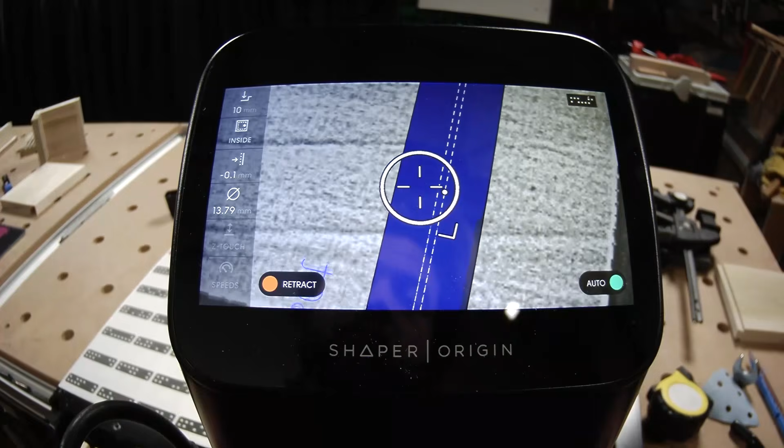Now, this is where if you have the stopped sliding dovetail versus the through sliding dovetail, you are going to see some differences. With the through sliding dovetail, if you get this taper right or wrong, it may seat further or closer to the front. When you have that stopped one and you have perfectly mating files, it's going to have a lot more specifics of how it fits.

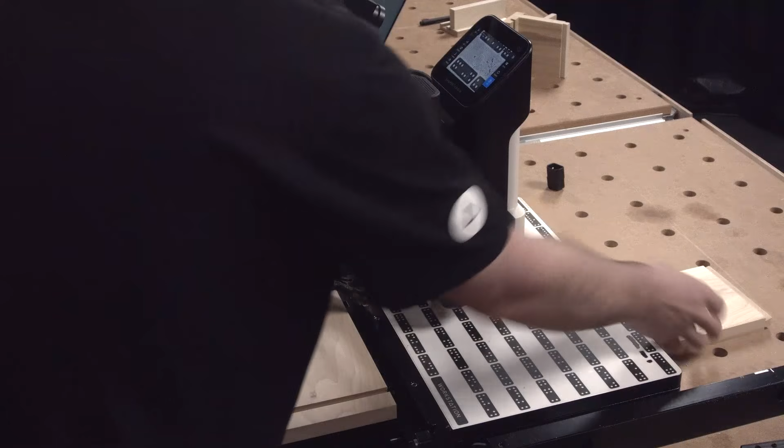And so this is one where, if I were doing this and I wanted these to be through, I would actually cut these longer than the piece we're going to finalize and just trim those sidewalls up afterwards. There we go. Oh, that's such a cool feeling. Yeah, so it's a little bit loose in the beginning, and as you get closer, it starts tightening up.

And this is where you're going to try to figure out that fit. It's funny, sometimes I have to sand the bottom of the stock because the ridges on the grain on the bottom are what's actually holding it up. Mm-hmm. No, that's a nice... I want to drive that all the way home.

Well, and you will get to the point where it feels so good, but it doesn't want to come out. And so the question is how many times you're putting it in or out, and what are you actually using this joint for?

I figured while Jake is looking at that one, I would just bring this little cabinet I built while I was testing this out this week and talk about a couple other little details. So you can see here, I have essentially 2 sliding dovetails on the ends, and I have this piece in the middle. Now, this piece is also a sliding dovetail, but I cut the tops off, and in the file, it's hard to see here, but I didn't actually cut this one all the way through.